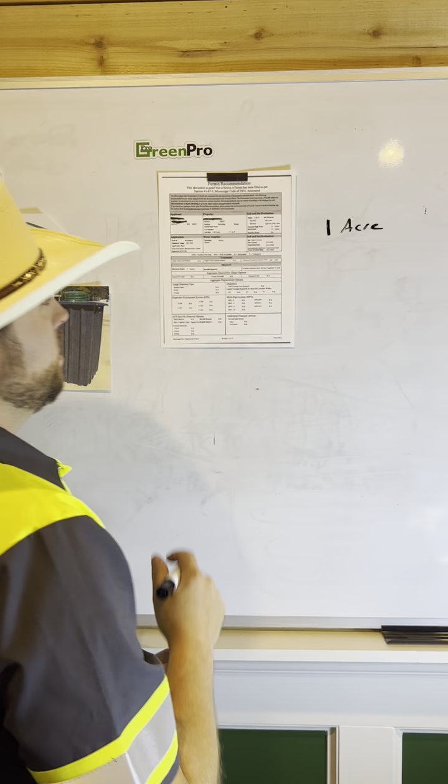The next thing is the type of soil that you have. In this case, the topsoil, which is going to be the first few inches, is going to be that silt loam. In other words, not very good. In fact, as you can see, as we go deeper into the subsoil, deeper than a few inches, we've got light silt clay loam.

Anytime you hear the word clay, you've got problems, meaning that that ground is not going to absorb water very fast. Especially on 1 acre, likely the health department's going to say that the size of the lot isn't big enough for a conventional septic system. This is most of the time the case, but with better soils, you'll see some options on this permit that would allow a conventional. And we'll talk about those in a minute.

Something else that's also very important to take notice of is the seasonal high water table and the restriction. So this water table is an indicator in the soil that water is at a certain height, meaning when it rains again and again and again, that's the level that water is sitting in the soil.

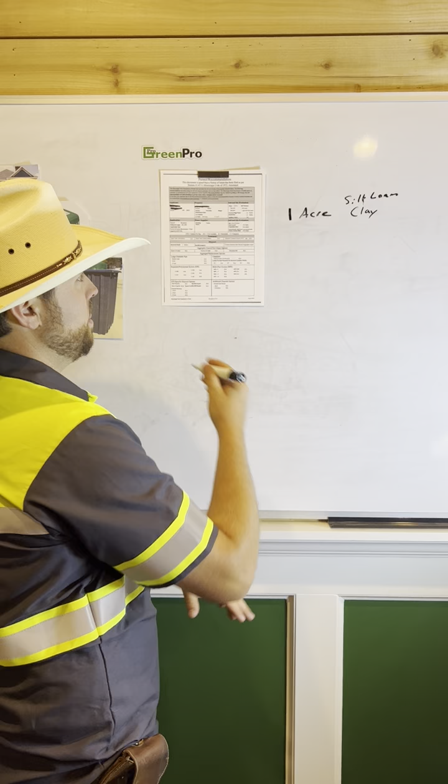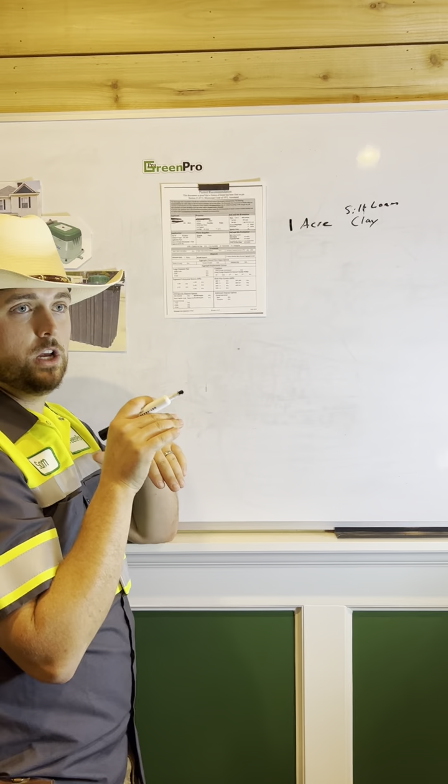So you can imagine if you have a set of absorption beds that are 3 feet deep, 2 foot deep, with a seasonal high water table of 13 inches, your absorption bed's going to be underwater, meaning it's not going to absorb any more water, and this particular site is not going to work with the conventional septic system. And that's what you'll see that the state agrees with. Here, as they come across, you'll see these NAs: septic tank with baffles, nope. Septic tanks without baffles, nope, not an option.

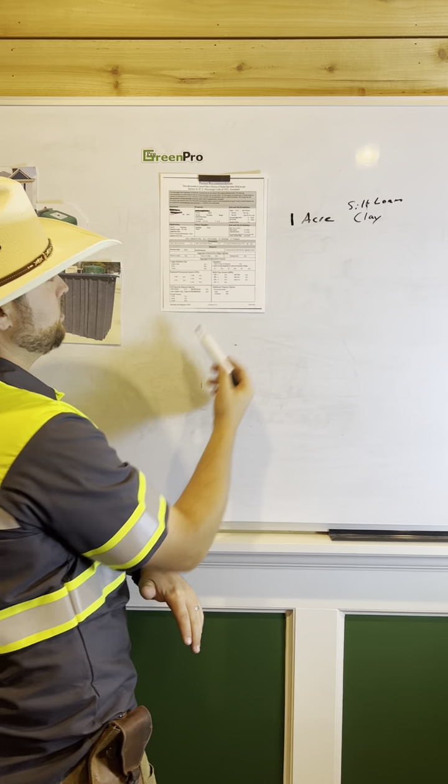We get over to the advanced treatment plant. This is labeled at 400 gallons per day. They've extrapolated that from the number of bedrooms, which is the maximum occupancy of the system. Again, information that you've given them on number of bedrooms, and they're going to tell you what that usage is. 400 gallons isn't an option. No one makes a 400 gallon per day treatment plant that's allowed in the state of Mississippi. So 500 would be that number that you're looking for.

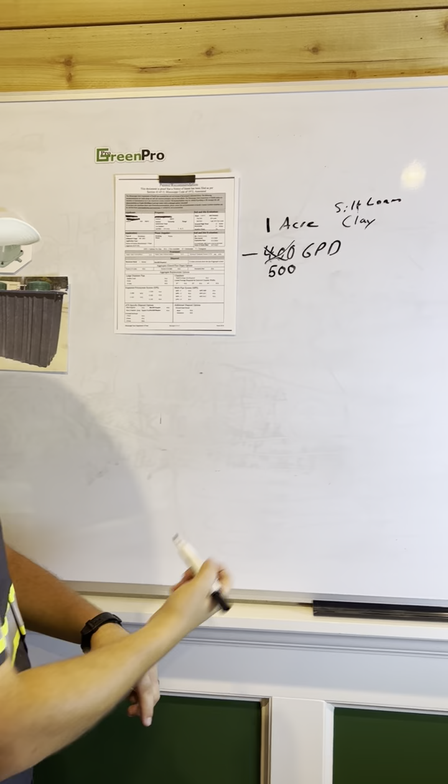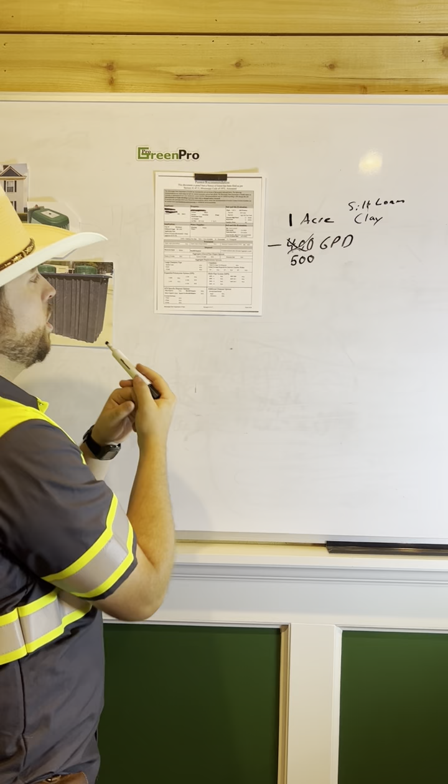We're going to come down to disposal. Disposal is telling you how we're getting rid of it. Treatment, what type; disposal, how we're getting rid of that water. As you can see, most of these field line options, which can be large diameter pipe, chambers, expanded, and multi-pipe, are all different types of underground absorption systems, which are not allowed according to the state based on this permit.

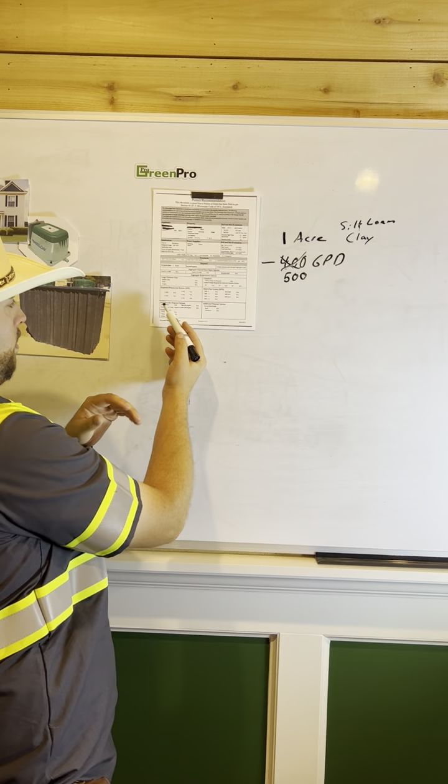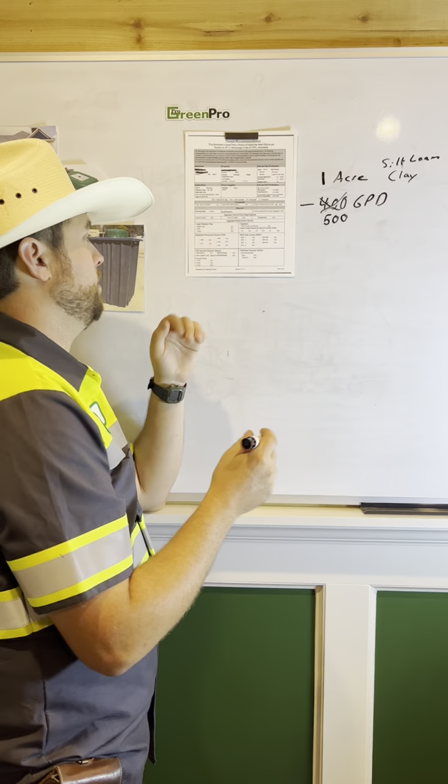We then look down because we have an advanced treatment plant. We've got our ATS, advanced treatment system, disposal options. Drip irrigation is not an option here. Most of the time, the state's not going to give you that number unless it's requested, because drip is so expensive, they're not going to waste their time putting that on this permit.

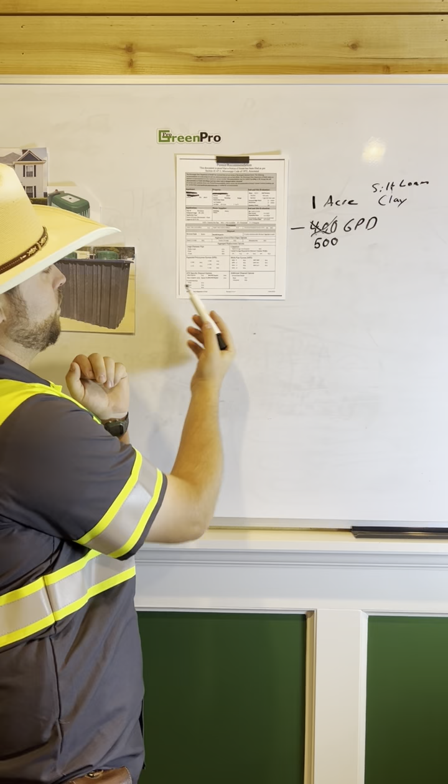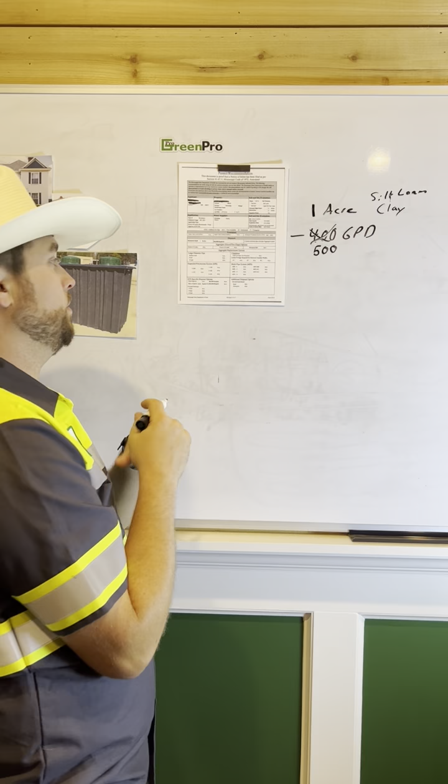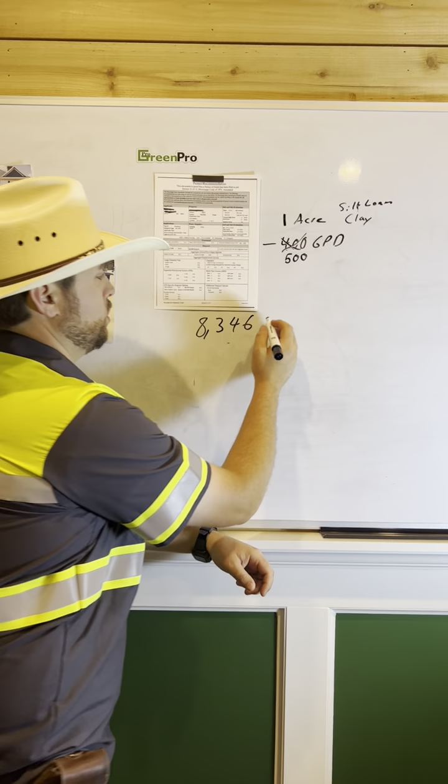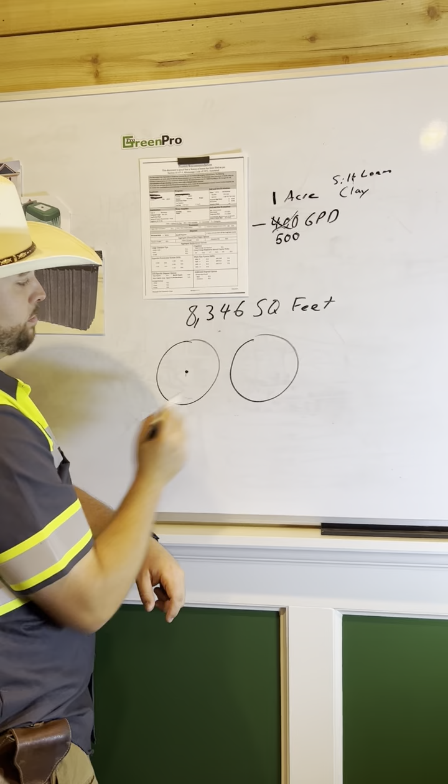In this, spray irrigation is the only type of system, and it's 8,346 square feet of spray. That is a lot of spray. That is going to take in 1 head, 2 heads. So imagine a spray head here with a 30-foot radius. So a 60-foot circle, 60-foot circle, 60-foot circle, and then a half. So that is a lot of water and a lot of area that's going to be taken up on this 1 acre.

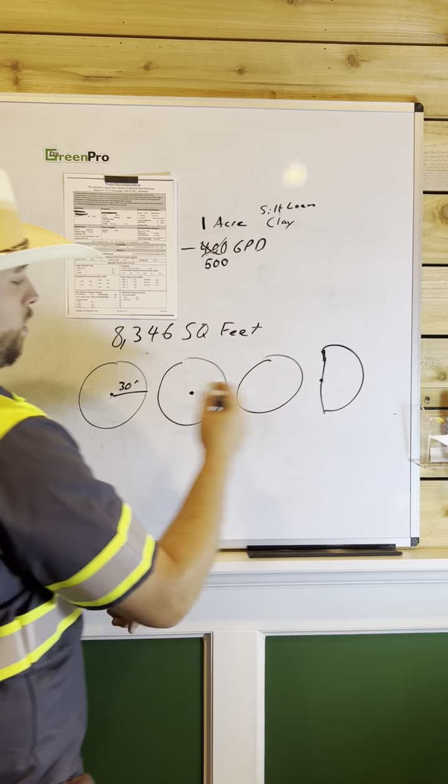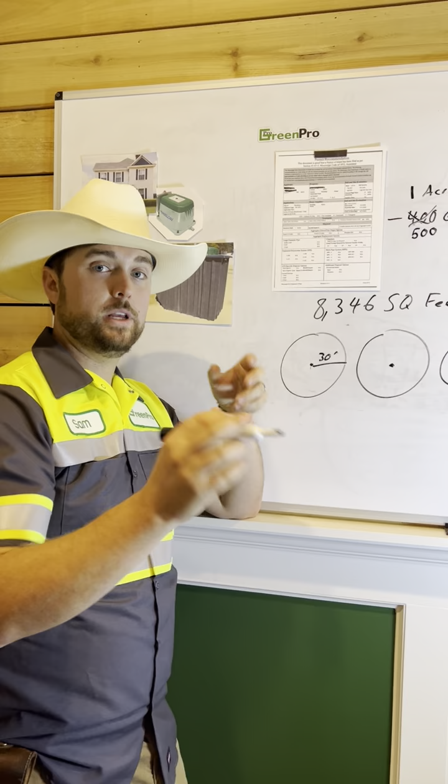Anytime you have a permit like this and you haven't started building your home or moved a home onto the property, we are cautioning you, please contact us, because where you put your home on that property will determine how much land we have there to use and how expensive that system is.

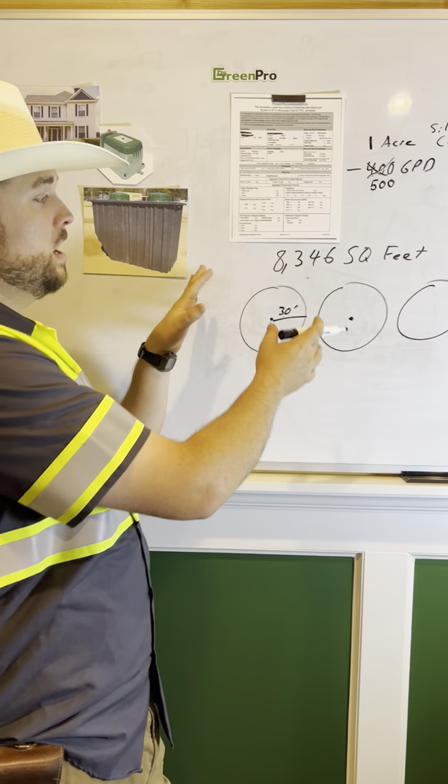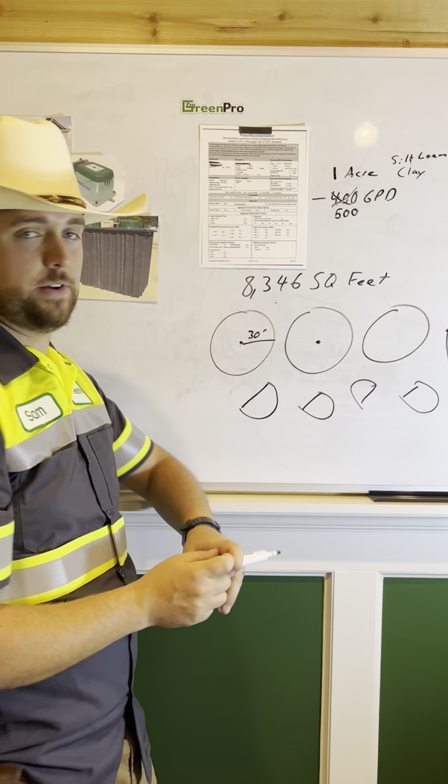If we can access a large area in the back and we can spray all of it, you're good to go. If we have to piecemeal multiple half heads around to equal these 3.5 heads all the way around with all kinds of complicated lines connecting all of these with PVC pipe, you can imagine how that would increase the expense of the system. Other than that, this permit's pretty self-explanatory.

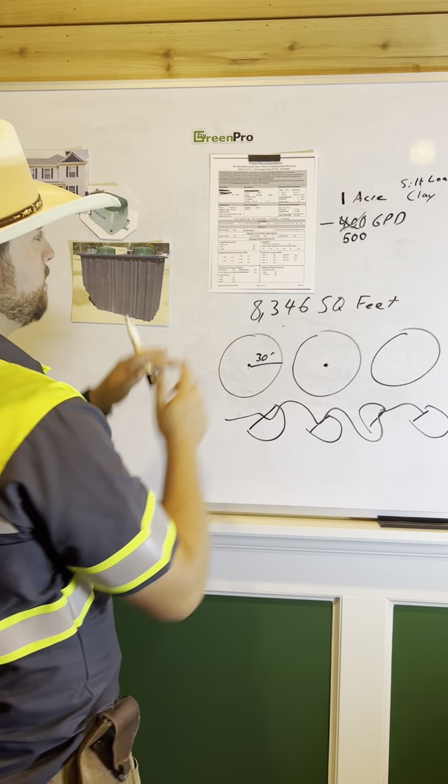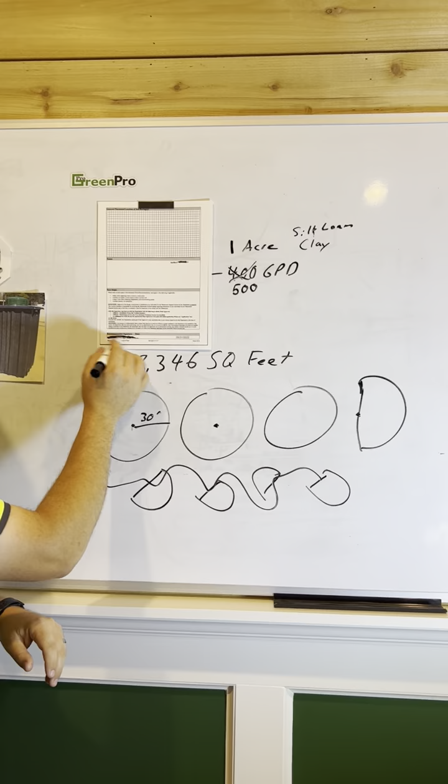Other information that we're going to need to know, which you can just email this to us and we'll have, is going to be the author of that, which is one of the local inspectors here, and we will be working with him in order to set up an appointment to get the system installed, so that he'll come back and inspect everything and we're good to go from there. So that's a permit from the Mississippi Department of Health, pretty much explained in depth.